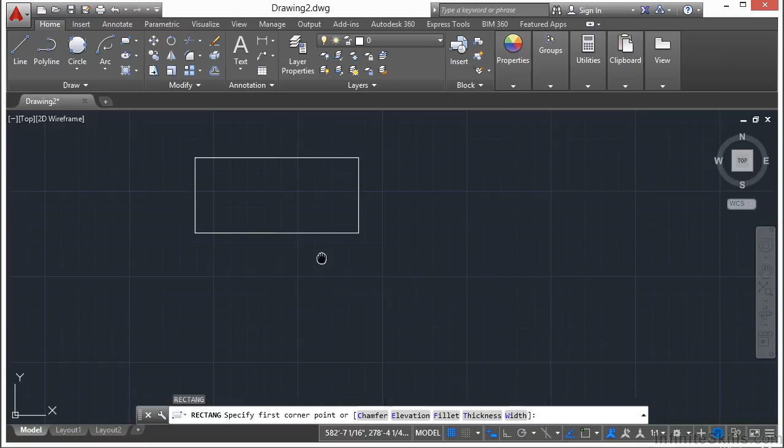You can just pick the command here out of the ribbon, or you can type in rectangle, or just REC, press return. So you pick your first point, and then you pick your second point. You can also define the lengths of the line to make it exact. You just type it in similarly to drawing a line.

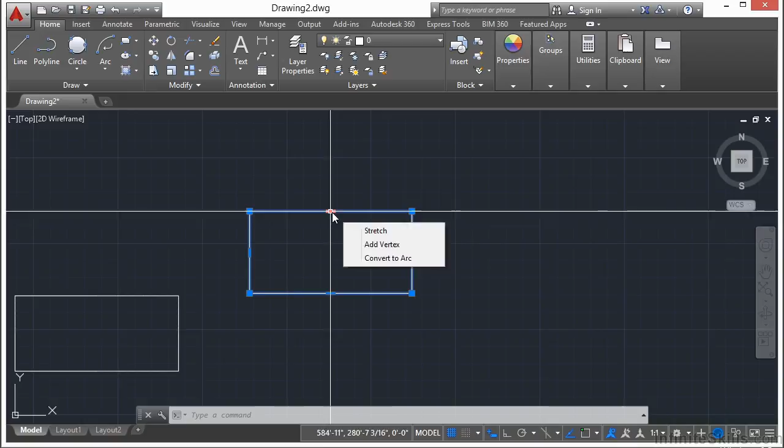Let's say I want it to be 24 inches. I tab over, and then we'll make it 12 inches high. And there we go, so we have drawn this rectangle at 2 feet wide and 1 foot tall. You can see when I select it, my grips tell me that this is also just a regular polyline.

Now there are some other options for the rectangle. If you notice here, you have chamfer, elevation, fillet, thickness, and width. To define the chamfer or fillet, you'll choose either the option C for chamfer or the option F for fillet, then you type in the value.

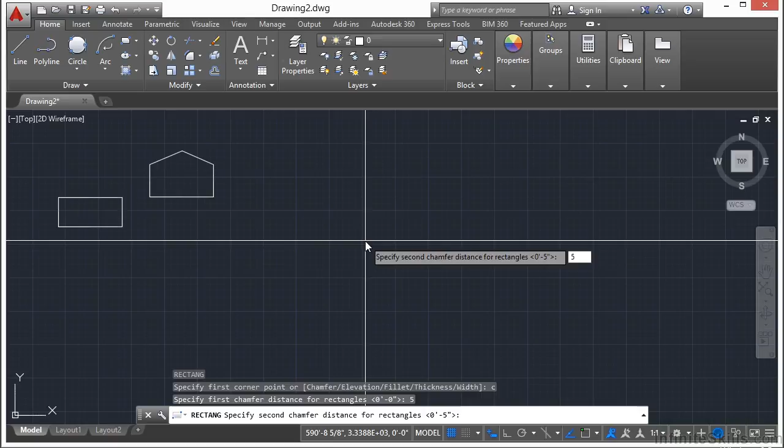So let's use a chamfer unit of 5. We're going to type in C, press return, type in 5, and then 5 again because it gives it a bit of an angle. So now I pick my first point, and it looks just like a regular rectangle until the box is big enough to have a 5-unit chamfer on the corners. That's a really cool trick.

If I do this again and select C for chamfer, let's say I go 10 units and then 5 units on that chamfer. Pick my first point, and you can see I have a chamfer here, but it's a little bit different because one is at 10 units and one is at 5. It goes down 10 and then 5. Keep in mind that first number you pick will go across and then up, and here it goes down and then across, etc.

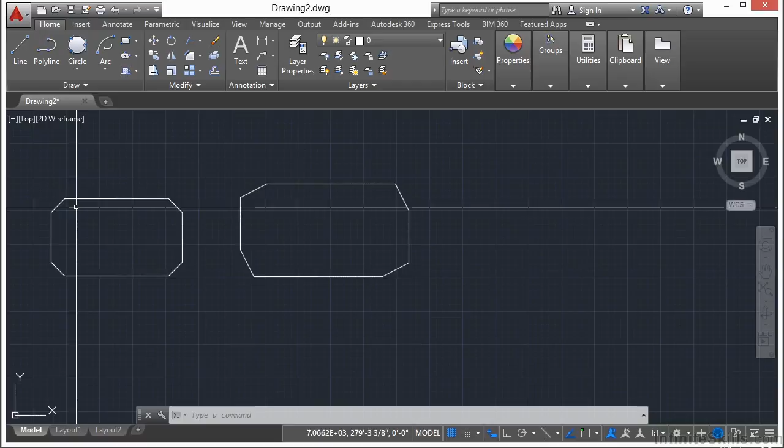Keep that in mind, you're going to get weird shapes, and you typically aren't going to need something like this. It's not going to give you something that is mirrored or symmetric unless both units are the same. So you're going to get kind of weird stuff, but if that's what you need, then it works out perfectly.

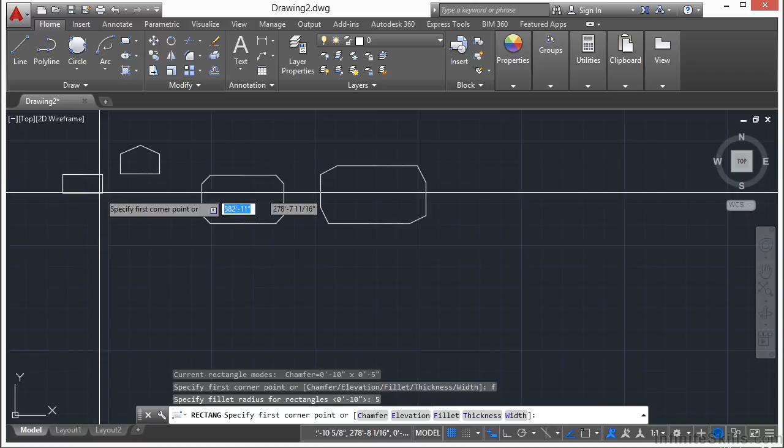Now the fillet option for the rectangle command works almost identically. You start the rectangle command, type in F for fillet, press return, and then you enter in a value. I'm going to enter in 5 again, press return. So instead of notched corners, the corners are going to be round, and it has a radius of 5 units. That's the fillet. It's very simple, and it makes a nice little shape.

Rectangles are simple polygons, but you can get pretty fancy when drawing with them. So we start the command again and look at the options, and you see that there is an elevation option. Well, that's for 3D work or for a thickness.

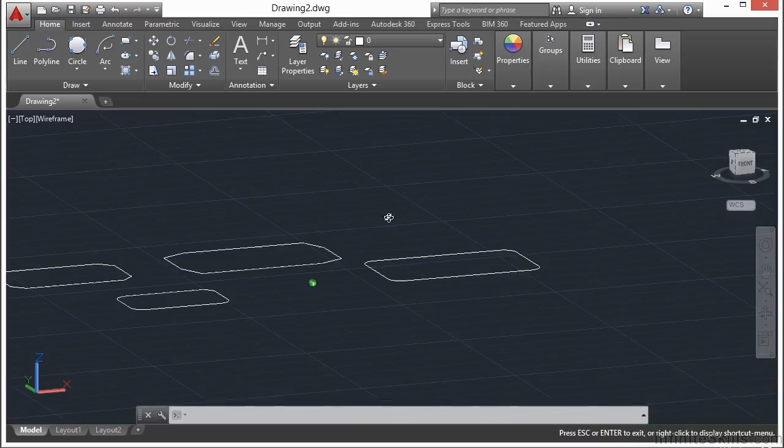So if I type in E for elevation, and I type in a value of 5, and then I draw my rectangle, I zoom in here, it looks exactly the same. Well, it's not—it's at a different elevation. It's up higher. It's kind of hard to see, but if I rotate my view, you see all of these rectangles are drawn at an elevation of 0. This one is at an elevation of 5. So that's just something else that you can do with it automatically.

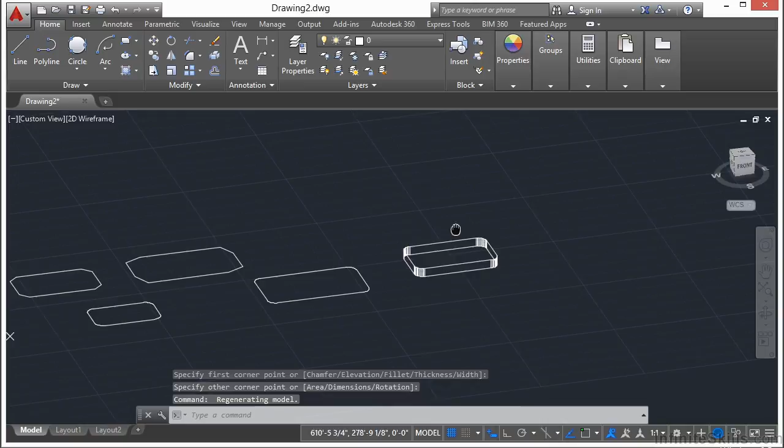Now my thickness option, I'm going to call it 5, and I'll draw a rectangle again. In 2D it looks the same, but when I rotate, it's 5 units tall or thick. It's also starting at an elevation of 5 because I made that change earlier, so you have to keep that in mind.

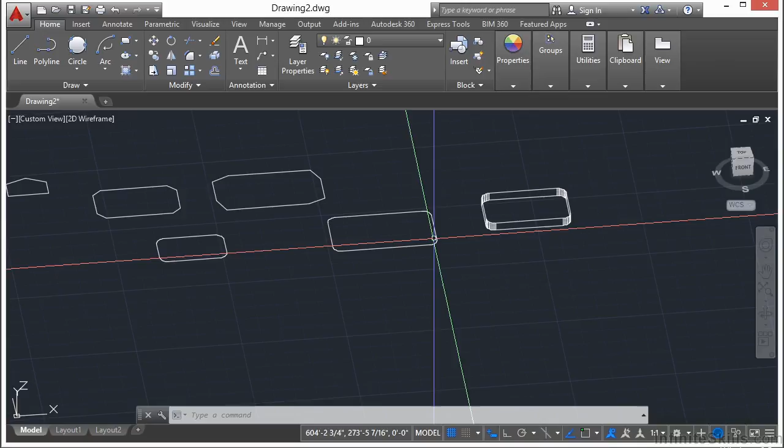Every little change I've made to the settings - I made a fillet for the corners, I changed the elevation to 5, and I changed the thickness to 5 - it keeps adding to that. It remembers, and keeps it the way you had set it before. So keep that in mind: it doesn't reset every time you start the rectangle command.

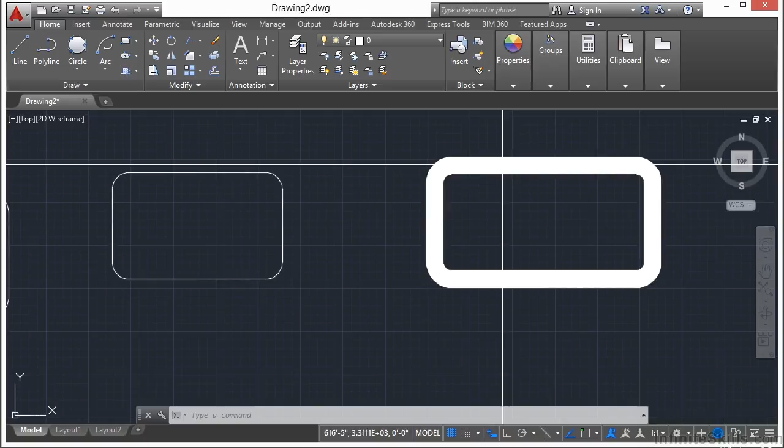On my last option, the width, type in W. Again, I'm going to use 5 since that number has been working so well for us, and I'll draw my rectangle. Now you can see I have a very thick, fat-looking rectangle with rounded corners. When I rotate, you can see it's 5 units tall, 5 units wide, and at an elevation of 5 units.

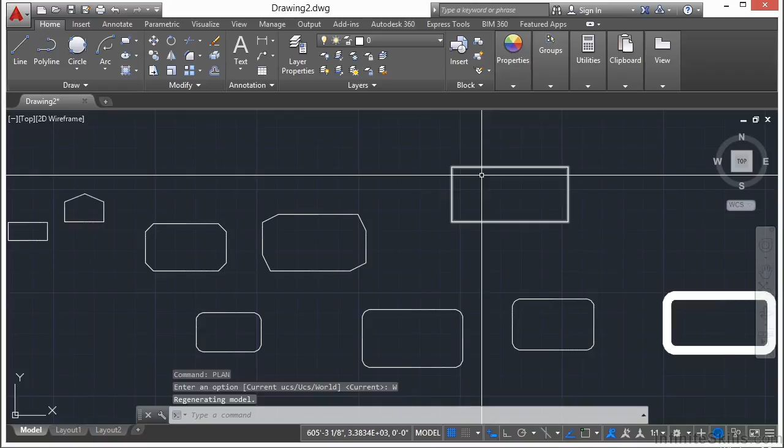So in order to reset all of that, I have to go through my rectangle command and all of my settings: go to fillet and set that to 0, go to elevation and set that to 0, go to thickness and set that to 0, and go to width and set that to 0. Now I have a regular, plain old, boring rectangle again. So there are a lot of things you can do with a rectangle besides just a regular old rectangle.

Now let's take a look at the ellipse command. Ellipse is essentially an oval, and there are basically two ways to draw them. The command starts and you pick the center point, then pick two other points. There are two other ways to draw it as well, but we'll start with the regular ellipse command. You can type the word ellipse, or just the letters EL, or go up to the ribbon and start the command.

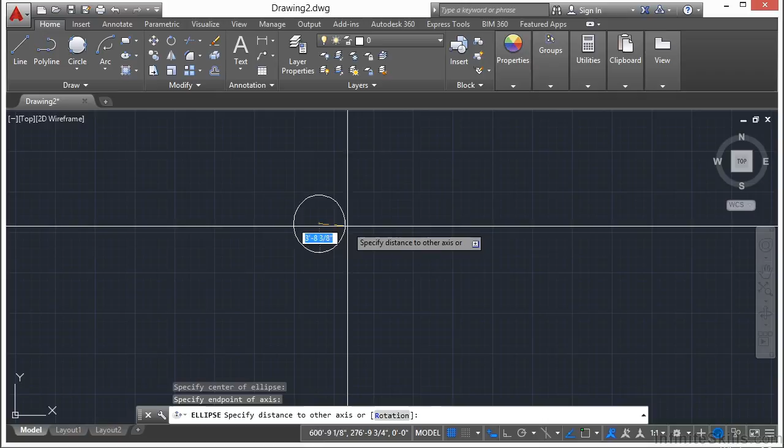First it asks you for a center point, then for a width point - think of this as a horizontal line that shows how wide it's going to be. Now you have to define the height. As you can see, as I stretch it, it goes from a circular looking object to a more oblong, traditional oval. That's it - it's very simple to draw.

Now if I turn on my ortho command, press the F8 key, or click down here, I can draw a very simple, perfect looking oval. You can use this a lot if you're making piping drawings in a profile view with an exaggerated Y-axis. In civil design you do this often, so I get to do this quite a bit - drawing pipe cross sections like this all the time.

So that's one practical use of an ellipse. Let's look at the axis and endpoints method. I specify my axis endpoints - that's my width, and it skips the circle part. I'm essentially picking on one side and then the other side - that's how wide my ellipse is going to be. And then I go to the height.

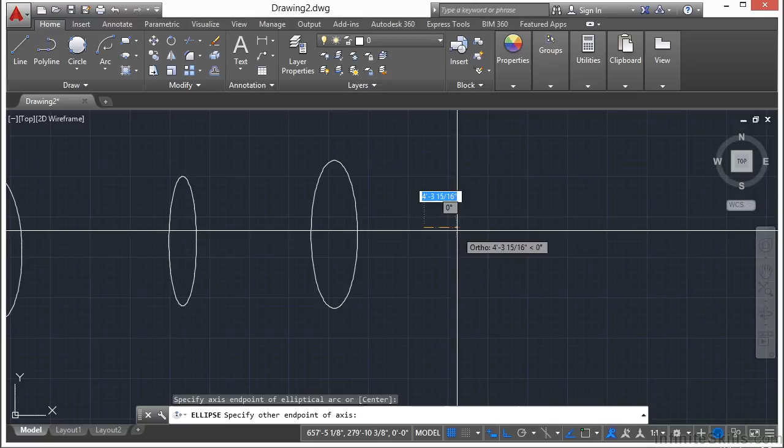Very simple. My other option here is the elliptical arc. Essentially I'm drawing an ellipse, but only drawing an arc. So I pick my center point, my width point - I'm defining how the ellipse is going to look. I'll turn off my ortho command for this part. Now I pick my start point, and now I'm drawing the arc length. That's how you get an ellipse like that.

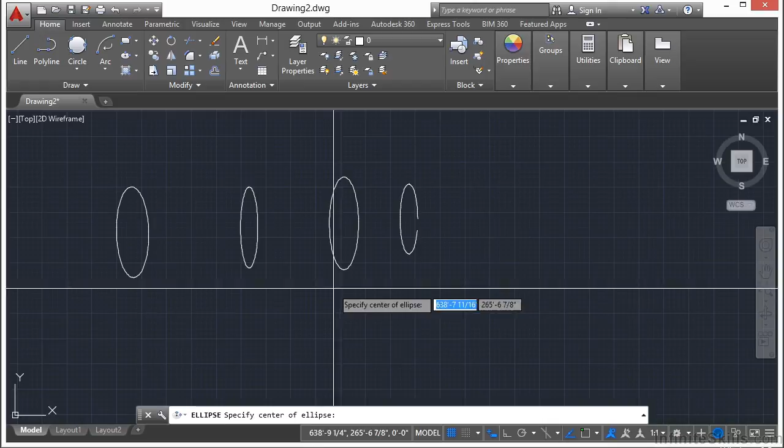Now keep in mind, if your ortho command is turned off, like I have mine off right now, when I pick my center point and then my width point, it's going to be drawn at this angle - not perfectly horizontal or vertical. So it can be oblong like that. There are a lot of different ways to draw it, and it depends on exactly what you're trying to draw, the perspective of it, or what information you have at the time.